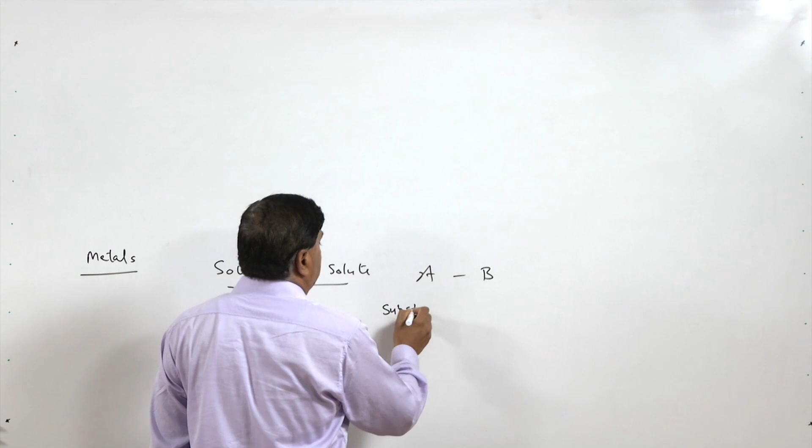We know that different metal systems are strengthened using different mechanisms, including solid solution strengthening, where in metal A, solute B is incorporated so that strength is achieved. Various types of solid solutions, like substitutional and interstitial, are formed. Interstitial solid solution results in much higher strength with the addition of solute as compared to the substitutional solid solution.

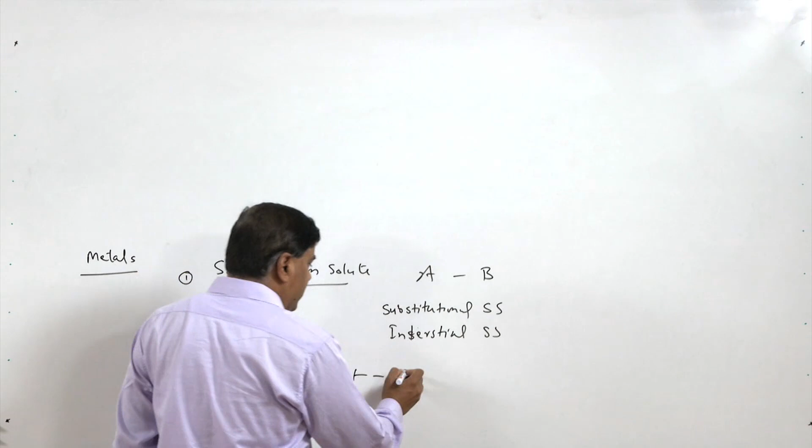Another commonly used mechanism is grain refinement. Metal systems are also strengthened by grain refinement, where strength or hardness is found inversely proportional to the square root of the grain size. Finer the grain, higher is the strength. So whatever factors increase the grain size, either in the weld or in the heat affected zone, they will lower the hardness as well as yield strength.

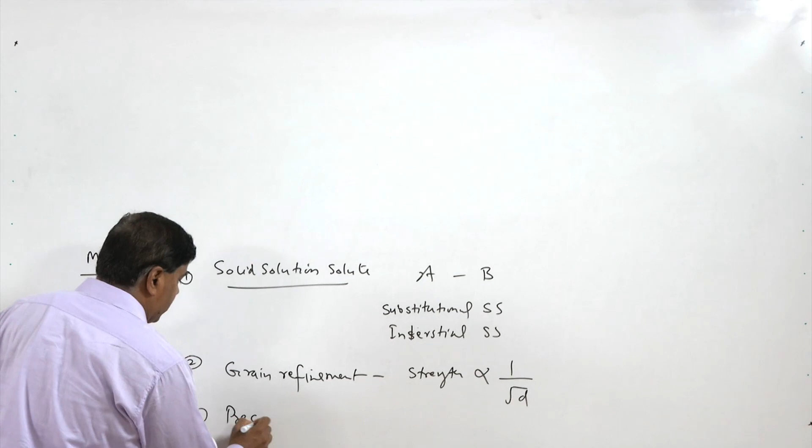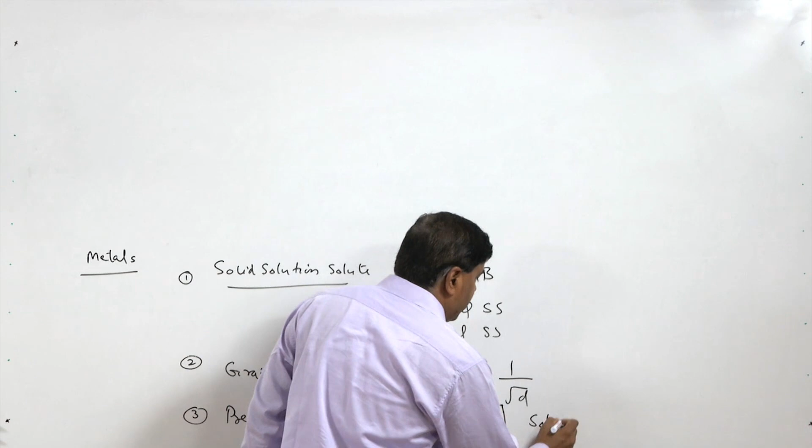Third is precipitation hardening. In this mechanism, whatever alloying elements are there, they are dissolved in the solvent through solution treatment followed by quenching, so that a supersaturated solid solution is formed, and then aging is undertaken. During aging, precipitates are formed here and there, and they impart strength or strengthen the material by forming precipitates in the matrix of the metal.

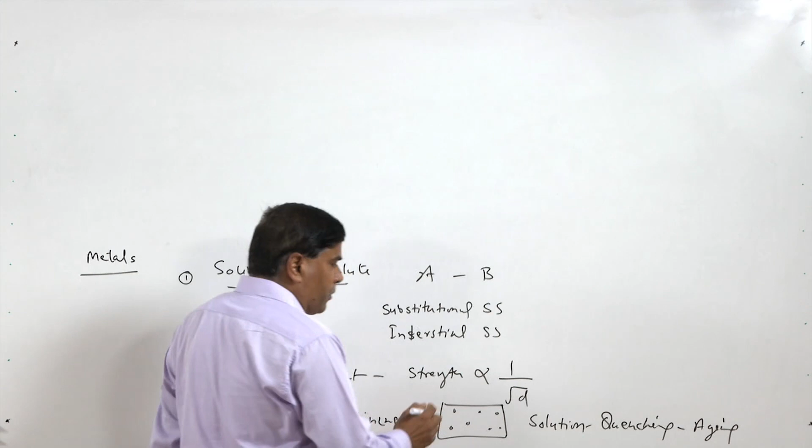So whatever factors lead to the enrichment or increase in number of precipitates will strengthen the material. Otherwise, whatever factors cause the coarsening of the precipitates or their dissolution - either the precipitates get dissolved in the matrix or they get coarsened - both these factors due to application of heat will lower the strength, because these metal systems get their strength from the precipitates, and whenever due to external factors like application of heat the precipitates either get coarsened or dissolved, the metal gets weakened.

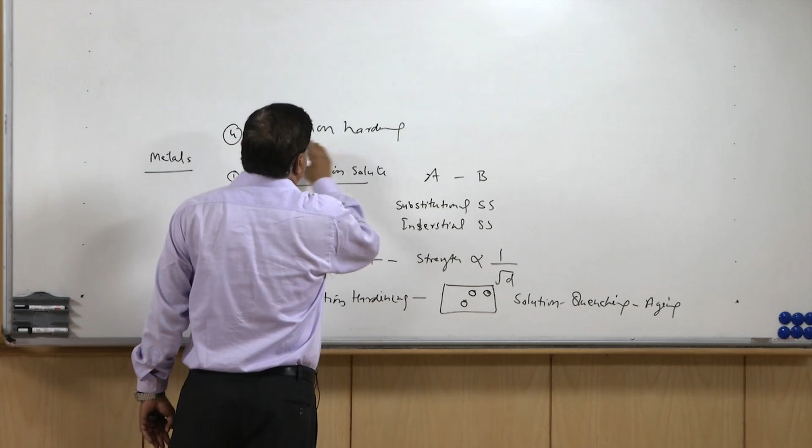Then the fourth mechanism is dispersion hardening. In case of dispersion hardened metals, the matrix is incorporated with certain constituents which do not interact with the matrix itself. These are mostly hard, but can be soft also to impart specific properties, like graphite or lead. Graphite is incorporated for the lubrication effect, and lead is incorporated for free machining, for developing free machining metal systems. But it is common to incorporate hard constituents in the matrix.

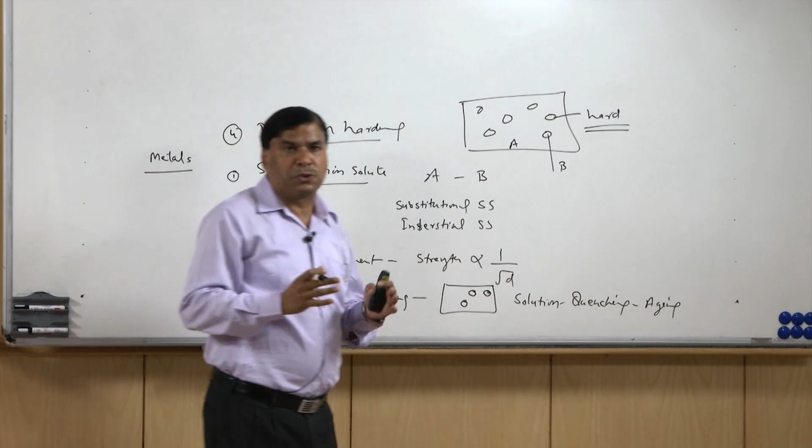So these constituents are not expected to interact - say matrix is A and the constituent being incorporated is B, these are not supposed to interact with each other. Each constituent retains its own identity, thereby imparting increased hardness, strength, improved lubrication or improved wear resistance due to the lubrication effect by solid lubricants like graphite, or improved machinability, etc.

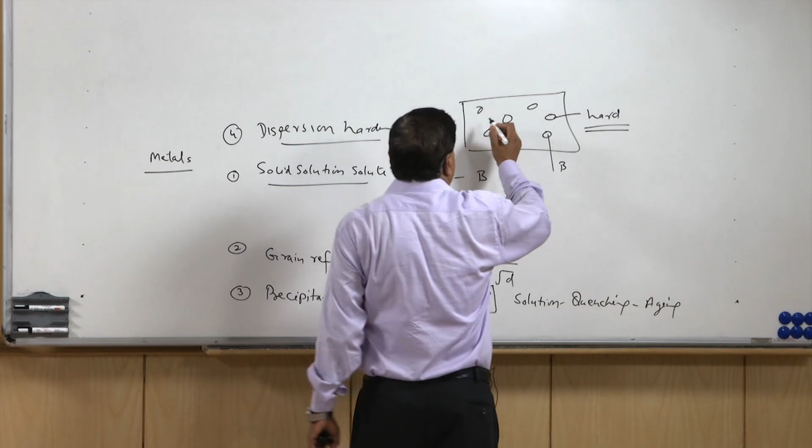So in this case, the application of heat during welding does not actually affect the characteristics appreciably, except whatever change in properties occurs will be due to the change in grain size due to the application of heat. And the fifth one is transformation hardening, transformation hardened metals.

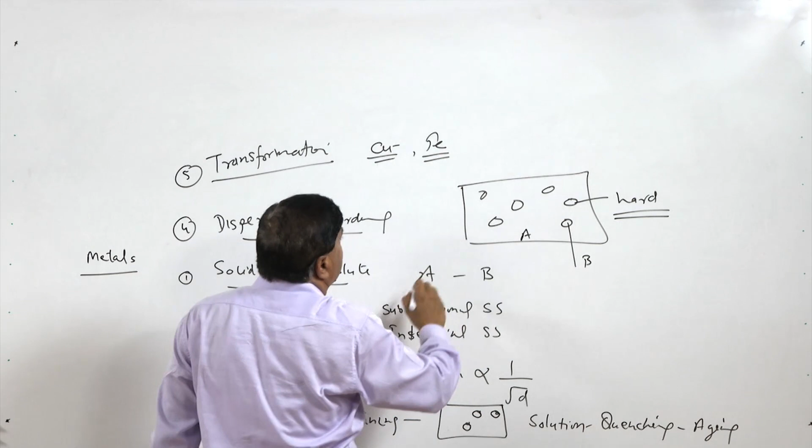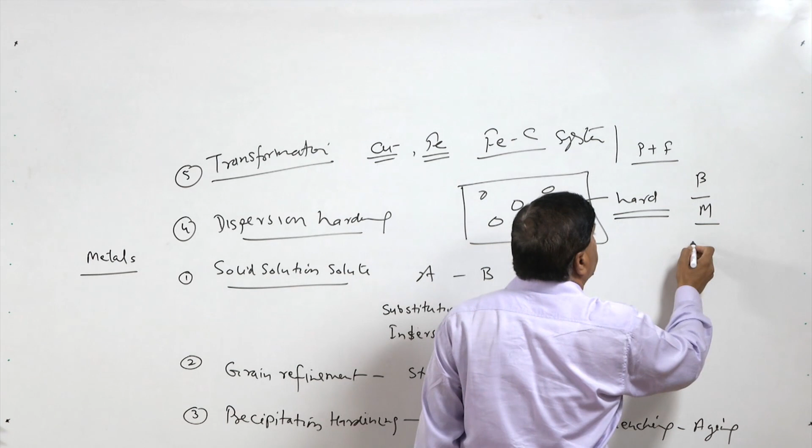Transformation hardened metals are mostly copper based alloys, or mostly iron based alloys. We know that iron-carbon systems form steel or cast irons as per the concentration. These systems result in the formation of different types of phases - in normal carbon steels we find pearlite and ferrite, but when subjected to specific heating and cooling cycles, we may have bainite, martensite, or a very fine mixture of ferrite and bainite, etc. So various phases can be formed, each having their own characteristics, and accordingly the properties will be affected.

In case of welding, the heating and cooling cycles are extremely fast. So the hardenable iron carbon systems result mostly in hardening of the heat affected zone.

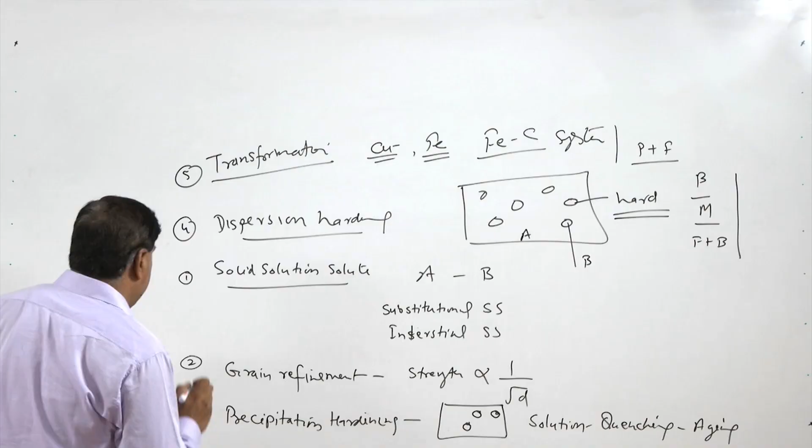So these are the five mechanisms which are there, and their relative effect is what we will be seeing. There is one more, the work hardening mechanism, which is also commonly used for strengthening of the metal.

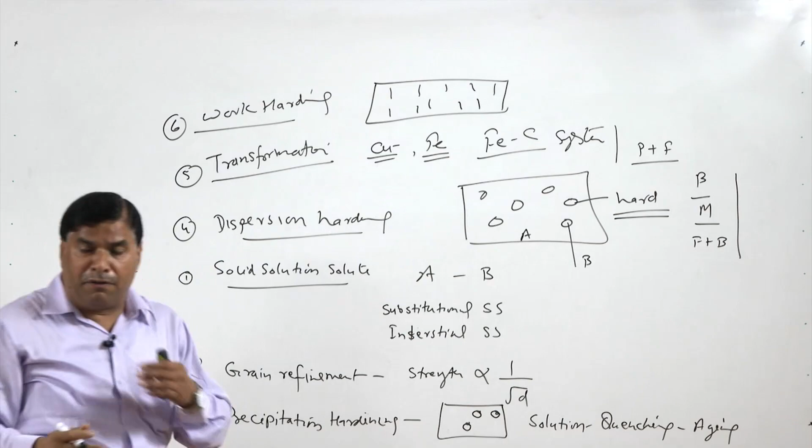In case of work hardening, the metal system is deformed plastically, which produces a large number of dislocations here and there. These dislocations interfere with the movement of other dislocations along the slip planes under external stresses, acting as a barrier for their movement, and thereby increasing the strength and hardness of the metal system.

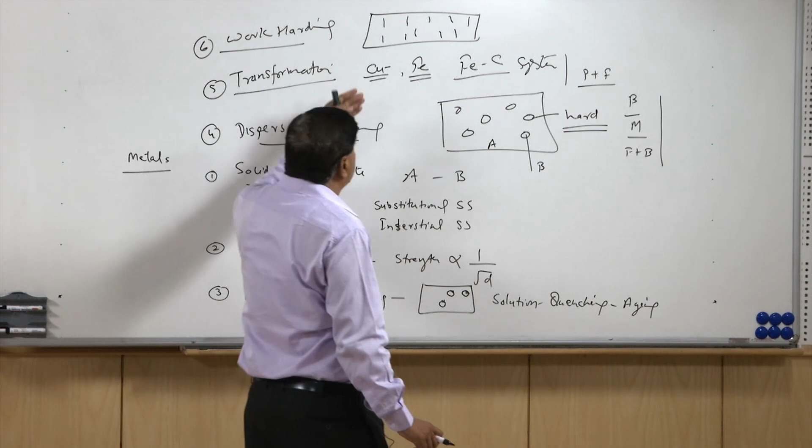As far as welding and the application of heat is concerned, these dislocations actually annihilate, they recover, they are lost due to the application of heat. So work hardened metal systems under the application of heat have the number of these dislocations reduced, which in turn softens the metal system.

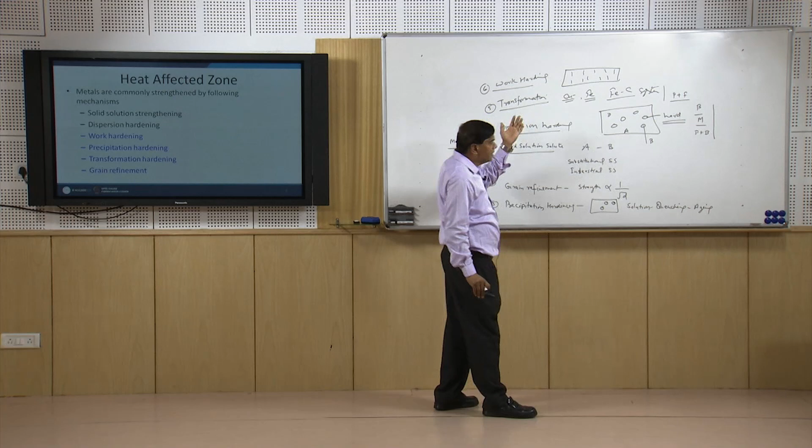As far as the heat affected zone is concerned, different metal systems strengthened by different approaches respond to the heat in different ways. So what is that effect? That is what we will be seeing.

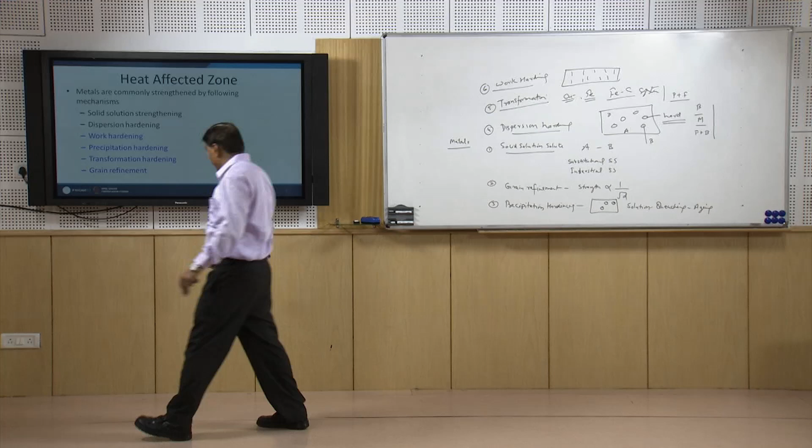The solid solution strengthened and dispersion strengthened or hardened materials are somewhat less affected by the heat applied during welding, while in case of the work hardening system, the effect of work hardening is lost due to annihilation or recovery of the dislocations, and the precipitation hardening is affected due to the application of heat

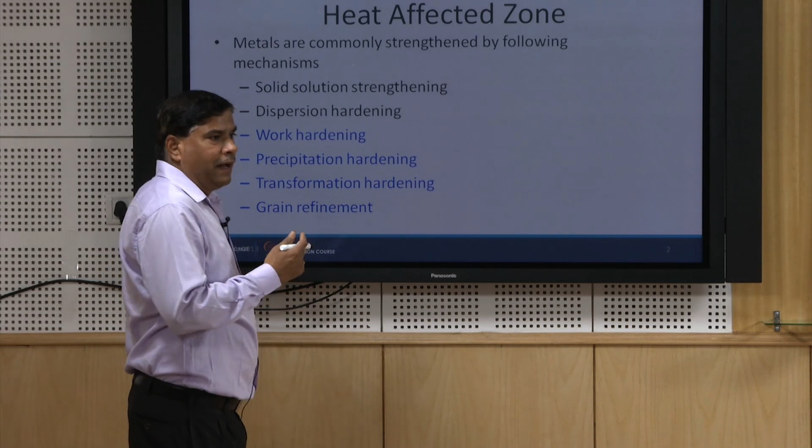during the welding heat affected zone near the fusion boundary. These precipitates either get coarsened, or they get lost or dissolved due to the application of heat. So the metal gets softened.

In transformation hardening, mostly high rate of heating and cooling, in case of ferrous metal systems, mostly causes hardening despite grain coarsening. And for grain refinement, the metal systems which are only strengthened by grain refinement, the coarsening in the heat affected zone will lower the hardness and strength of the metal system.

So this is a very generic kind of description of the different metal systems and the way by which things will be affected with respect to the heat affected zone. Now I will be elaborating what the heat affected zone is first, and then the way by which a specific kind of metal system is affected with the application of heat, or due to the weld thermal cycle.

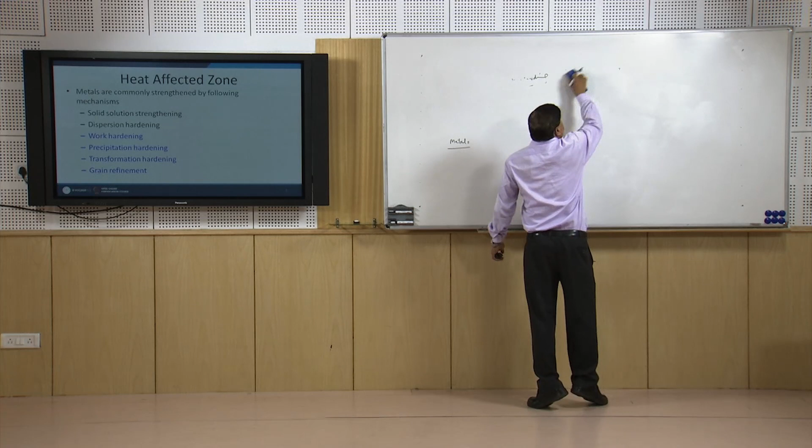So the heat affected zone, as it reflects from its name or term, is the zone or region of the base metal which is affected by the heat applied during the welding of a given metal system. Every region which is affected by the heat, in terms of structure or mechanical properties, will be falling under the category of the heat affected zone.

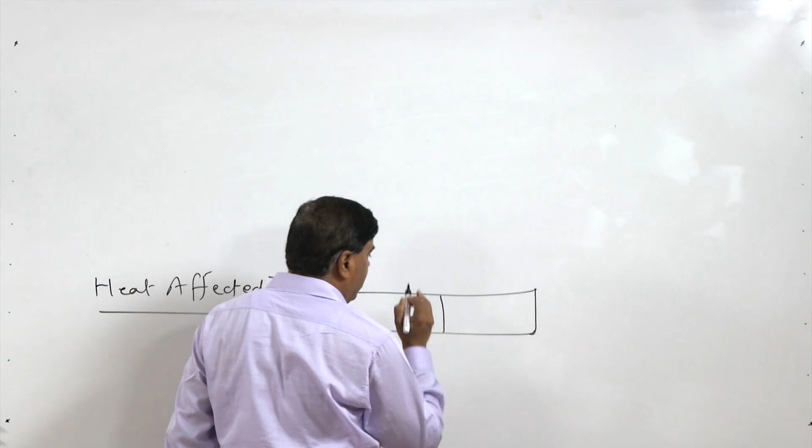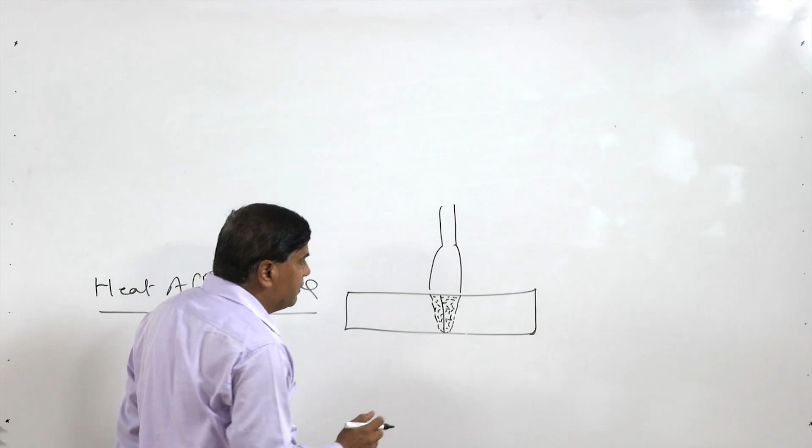During welding, the plates are joined with the application of a heat source. Say a suitable arc is used for melting the edges of the plates to be welded. This melting results in the weld metal, and some of the heat applied for melting the edges of the plates is transferred to the underlying base metal. This heat which is transferred back to the base metal, away from the weld metal zone, is termed as the heat affected zone.

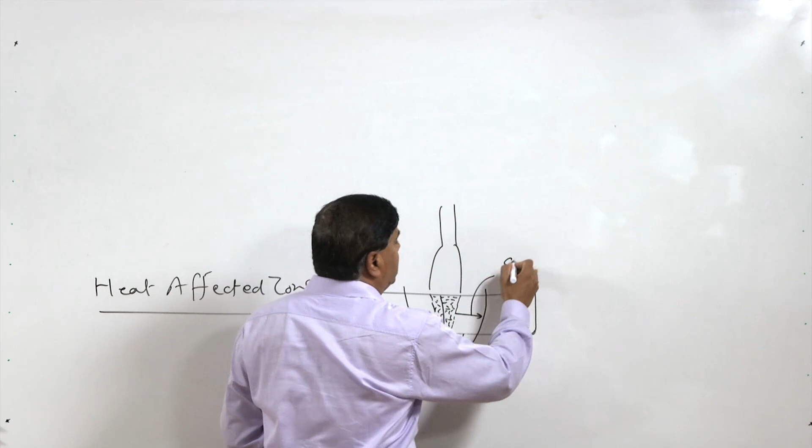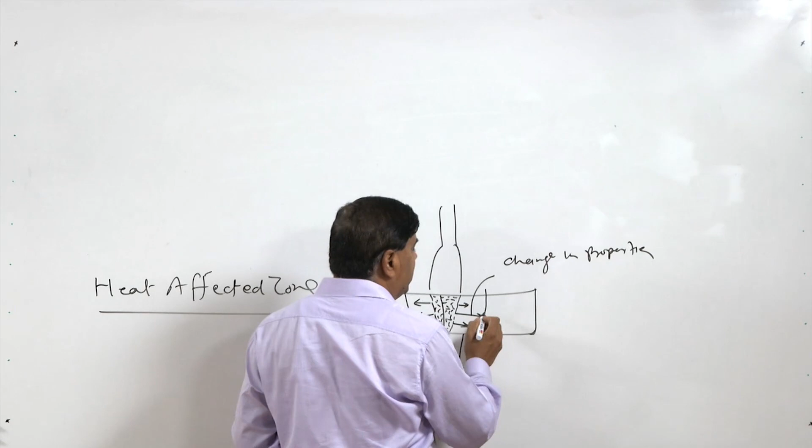But up to what extent the heat affected zone will be formed depends on the distance up to which the change in properties is observed. So heat will obviously be transferred from the fusion zone to the base metal side, in both directions, and due to this heat there will be a rise in temperature. The rise in temperature up to a particular limit for a given metal will cause the change in properties of the base metal.

This change in properties may be in respect of microstructural variation in terms of mechanical properties, wherein either hardening or softening of the metal in the heat affected zone can take place, or there can be loss of corrosion resistance.

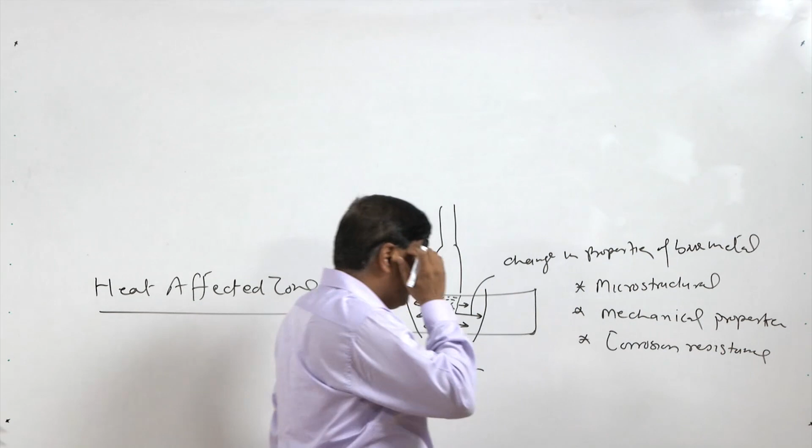Corrosion properties can also be affected. Whenever heat is applied to the plates for fusion, some of the heat is transferred to the base metal, and this changes the underlying base metal properties in respect of structure, mechanical properties, and corrosion properties, either singly or in combination.

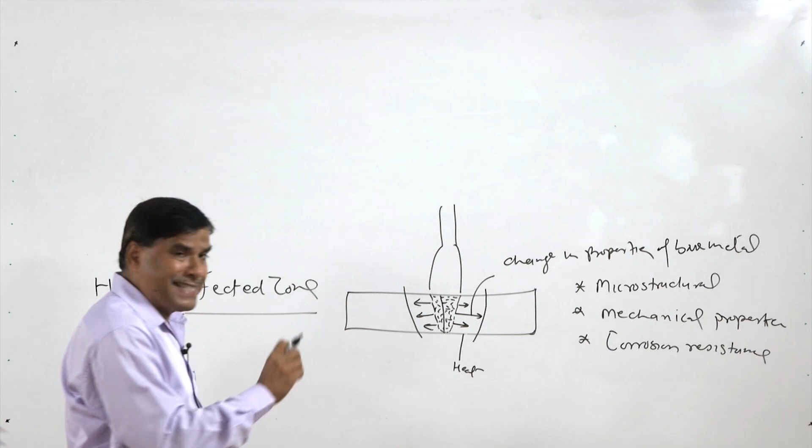The distance up to which these properties are affected is material specific. This change may occur up to the region heated above 200 degree centigrade, or above 500 degree centigrade, depending upon the metal system. For example, when aluminum systems are welded, the regions heated above 150 degree centigrade will fall in the heat affected zone.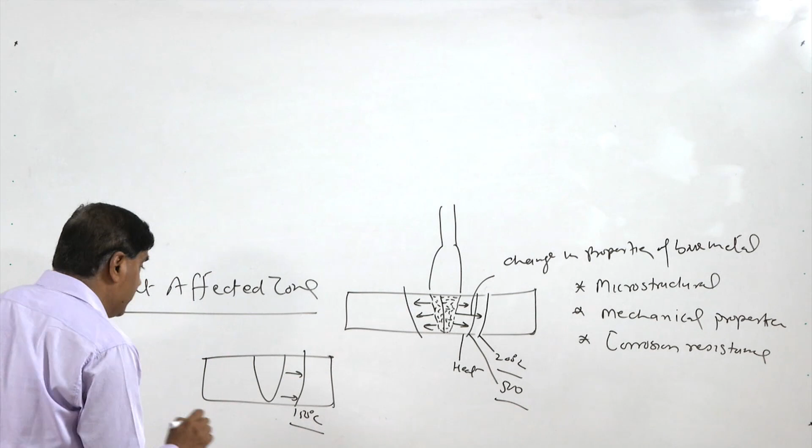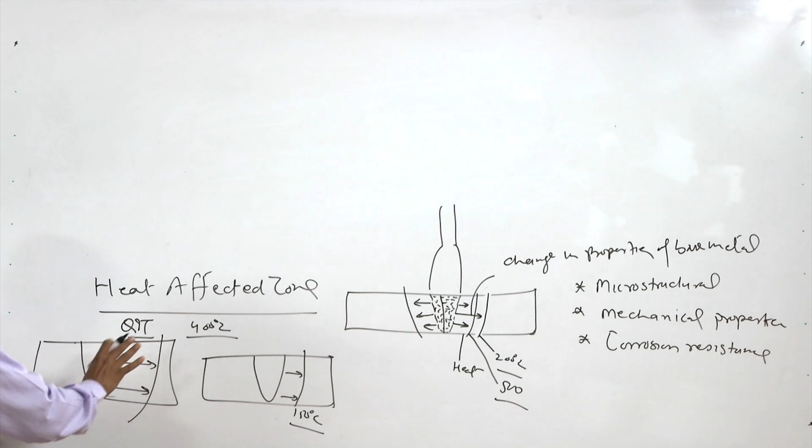In case of steel, say carbon steels in normal annealed condition, the regions heated above 730 degree centigrade form the heat affected zone. If it is in quenched and tempered condition, say Q&T steel tempered at 400 degree centigrade, all regions heated above 400 degree centigrade will be over tempered. So all regions away from the fusion boundary heated above 400 degree centigrade will fall under the heat affected zone.

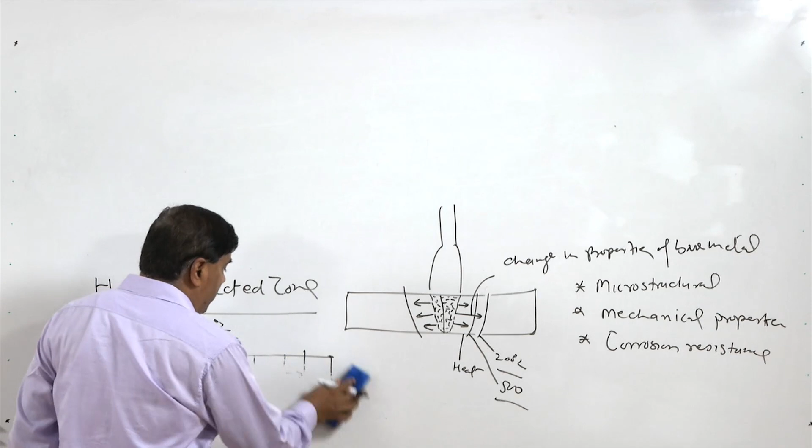So the temperature above which the heat affected zone is formed is material specific, and even for a given metal system, its condition also affects that particular temperature. This temperature may be 150, 200, 400, 800, anything, depending upon the kind of metal system. This is how the heat affected zone is defined, and it experiences change in properties due to the heat applied during welding.

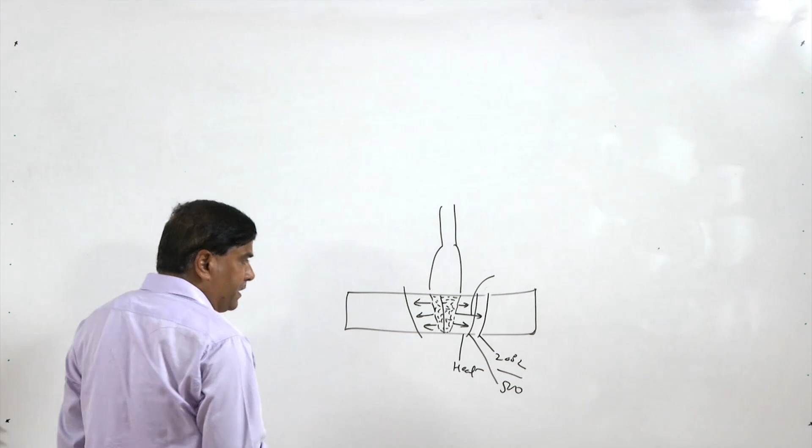Whenever heat is applied, fusion occurs at the faying surfaces. If we take 3 points away from the fusion boundary - point 1, point 2, and point 3 - each point experiences a different weld thermal cycle. Point 1 experiences higher peak temperature and higher cooling rates.

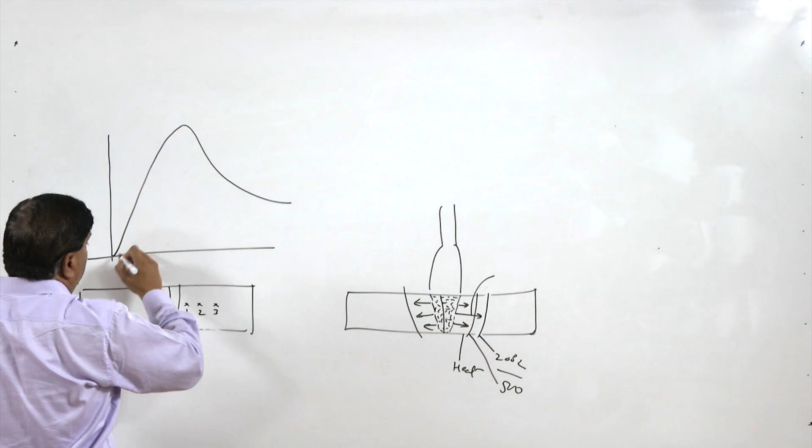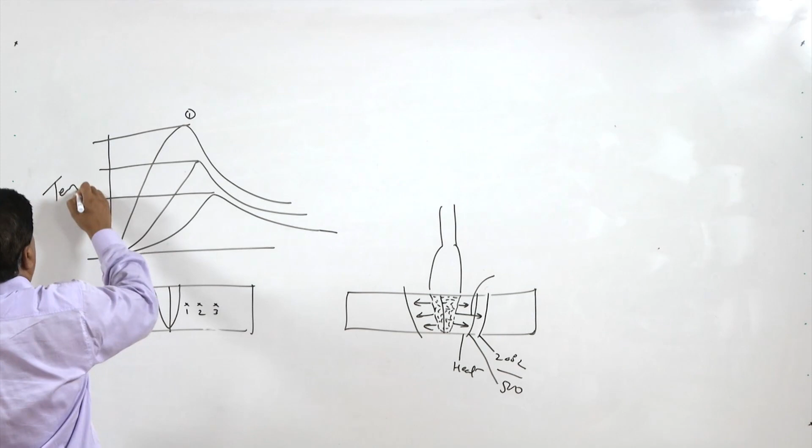Similarly, point 2 experiences somewhat lower peak temperature and lower cooling rates, and point 3 has even lower peak temperatures and lower cooling rates. So for point 1 this is the peak temperature, for point 2 this is the peak temperature, and for point 3 this is the peak temperature. On the y-axis we have temperature, on the x-axis we have time.

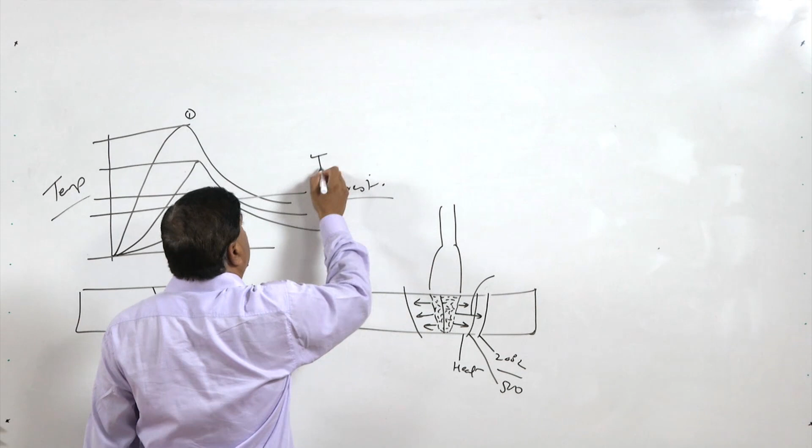This reflects that if we take any particular temperature, the 3 points will be exposed above it for a particular duration. If this is the temperature of interest, above which properties will be affected, we can find the duration for which point 3 is exposed.

The duration for which point 3 is exposed above the temperature of interest is just this much, while the duration for point 2 is this much, and similarly for point 1 and point 2 marked here.

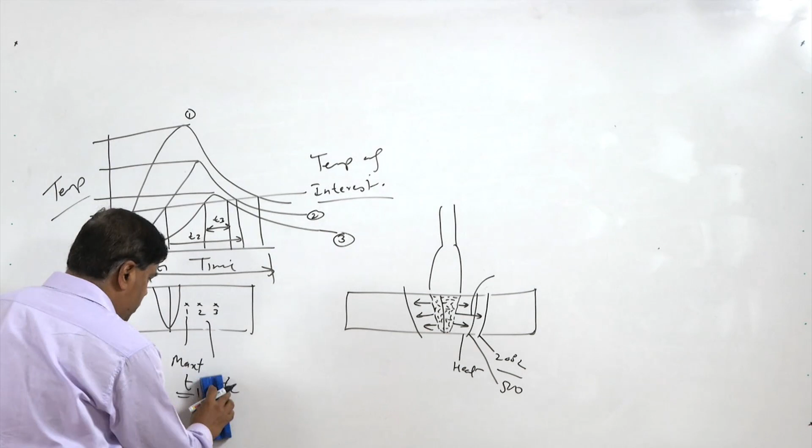So t1 is for point 1, t2 for point 2, t3 for point 3, and we see that t1 is really very long. If the temperature of interest is known, T1 will be exposed for the maximum time, then T2, then T3. So T1 is maximum, T2 is lesser than T1, and T3 is minimum.

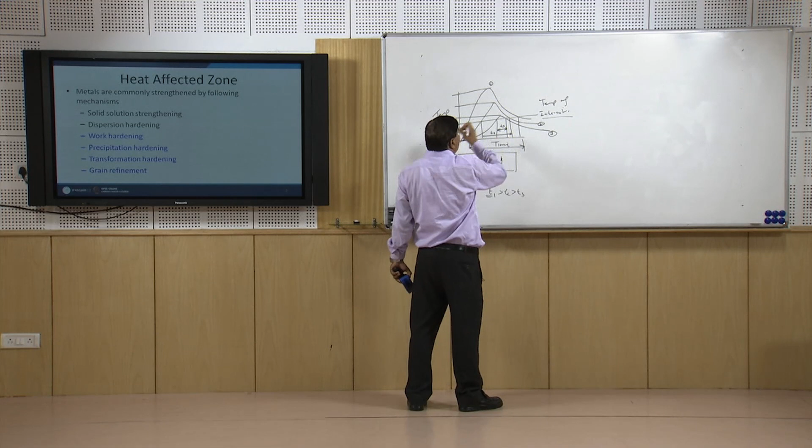The temperature and the time for which a particular point is exposed governs things appreciably. Different zones experience different peak temperatures and durations. Point 3 experiences a very low peak temperature for a very short duration, while the peak temperature for point 2 is higher, and for point 1 is higher still. So the temperature to which a point is exposed and the duration above that temperature are two factors that play a big role in determining the characteristics of the heat affected zone.

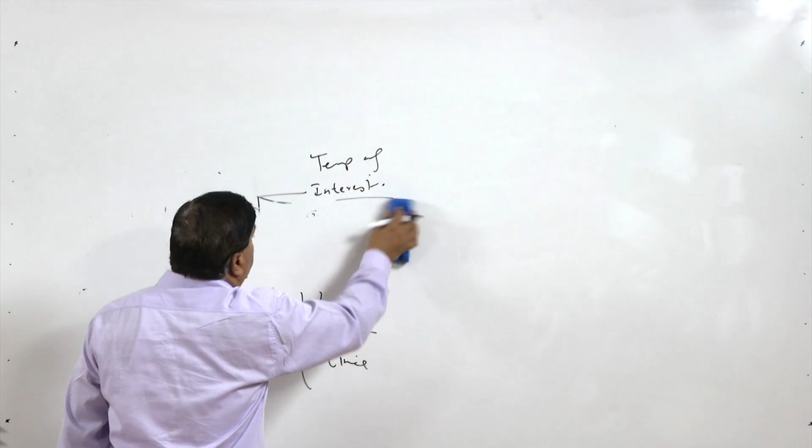Considering this background, we will now see how different metal systems respond. Here I will first talk about the work hardened metal system.

Work hardened metal systems, work hardening metal systems.

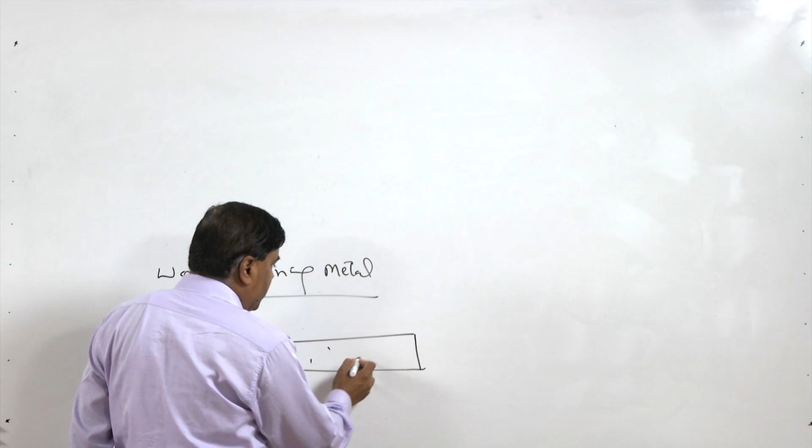We know that most metal systems during manufacturing are deformed plastically, and they get strength from that, like rolling or forging, especially done under low temperature conditions. Under those conditions, plastic deformation develops a lot of dislocations, which in turn increases the strength and hardness of the metal system. Work hardening metal systems are designed to be deformed for fabrication purposes, so that during manufacturing itself sufficient dislocations are generated, and these dislocations impart strength and hardness to the metal system. But when these metal systems are subjected to welding, in which way do they respond? That is what we will see.

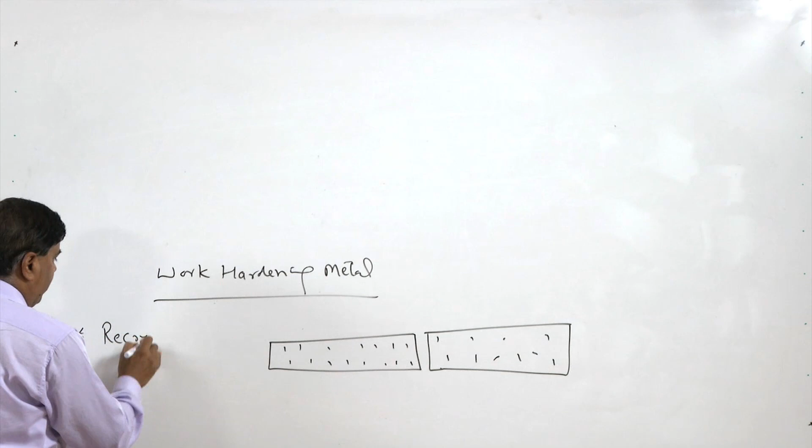There are basically two ways by which work hardened metal systems are affected by the application of heat during welding: recrystallization is one, and grain growth is another. Both these factors are influenced by the heat applied and the time for which the high temperature is maintained.

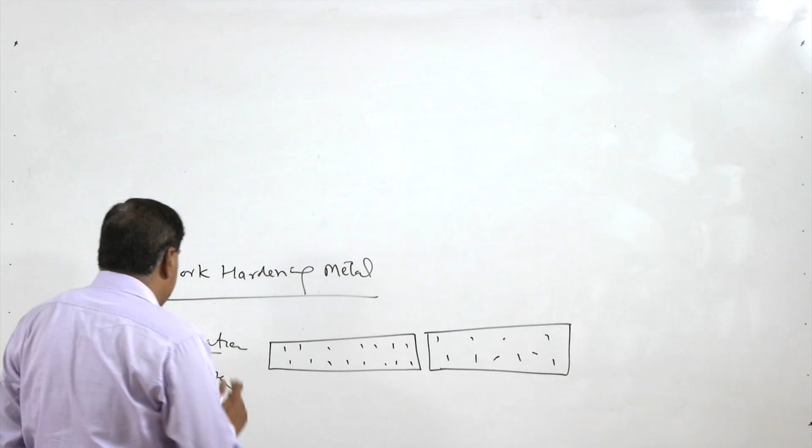So we will take up the first one, recrystallization. The driving force for recrystallization is the strain energy stored - greater the deformation, greater will be the strain energy stored, so easier will be the recrystallization. Recrystallization occurs at a particular temperature.

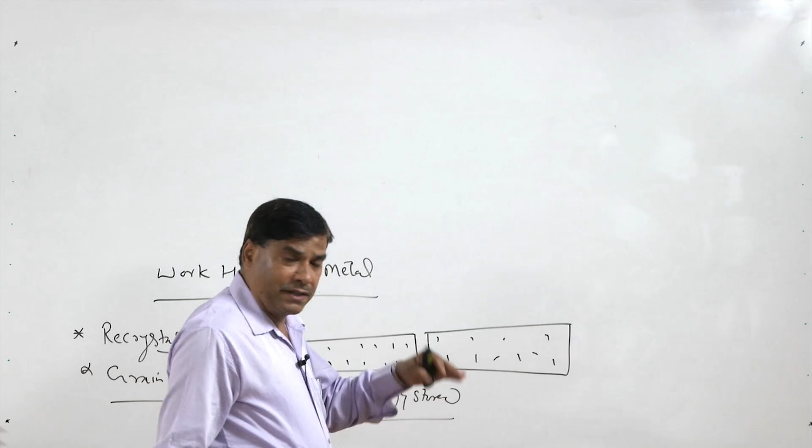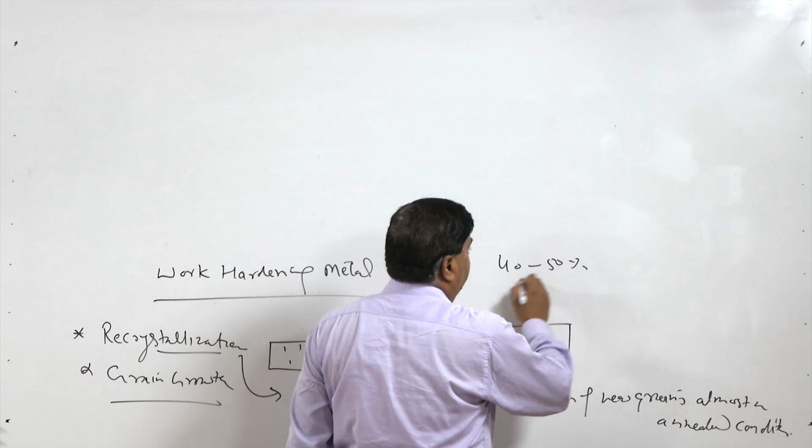So what is recrystallization? It is about the formation of new grains, almost in annealed condition, meaning all the work hardening effect is lost and whatever new grains are formed are in annealed condition. This formation of new grains happens at a particular temperature, like say 40 to 50% of the melting point temperature in Kelvin of the given metal, and this temperature sometimes decreases with an increase in the strain energy stored, due to the kind of deformation the material has been subjected to. So what we will see here is that the strain energy stored affects the temperature at which recrystallization occurs.

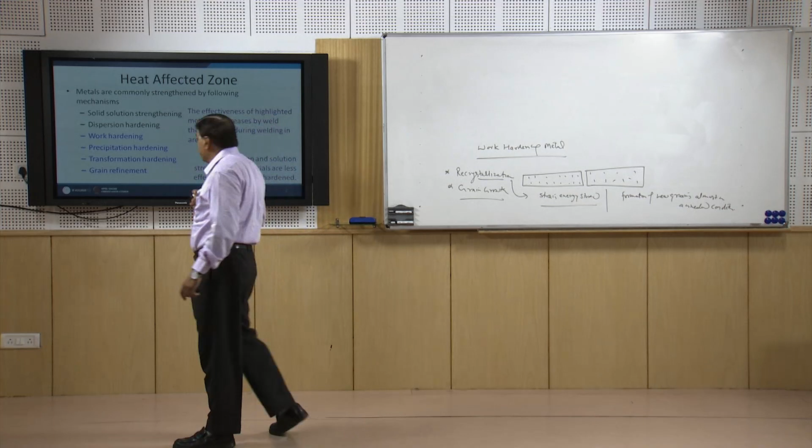As we increase the deformation, increase in elongation takes place, say increase in strain is taking place. So the stored energy increases continuously, and the fraction of energy stored out of the energy supplied keeps on decreasing. So strain energy stored increases with the strain or deformation being applied.

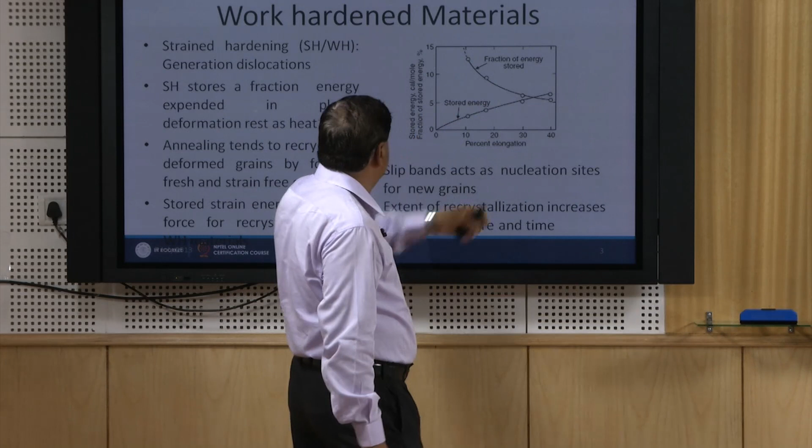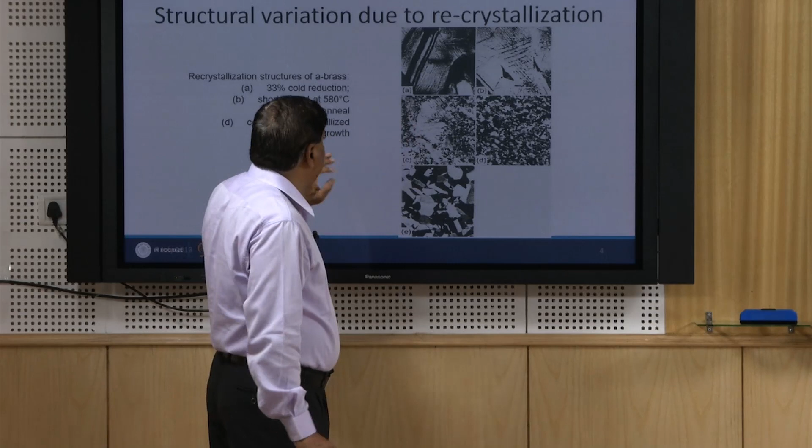Whenever heat is applied, the material in a very strained condition offers a large number of dislocations. When the material is annealed for a short period, some of these dislocations are lost or annihilate, and further longer annealing results in complete loss of these dislocations, and then complete recrystallization and formation of new grains take place with continuous exposure at high temperature - that is called annealing. And after complete recrystallization, if further exposure at high temperature during welding continues, it results in coarsening of the grains.

So material, right from its original deformed state showing a large number of dislocations, will have these dislocations keep decreasing with increase in time at a particular temperature during annealing, and overexposure causes grain growth - this is the third or last stage. So first recrystallization, and thereafter grain growth takes place.

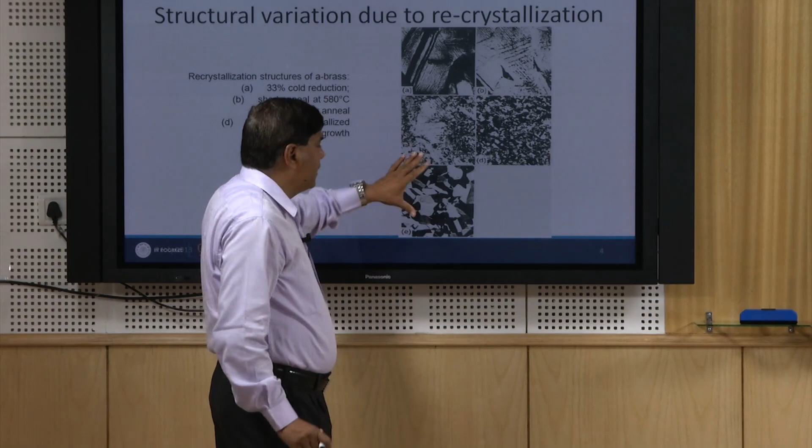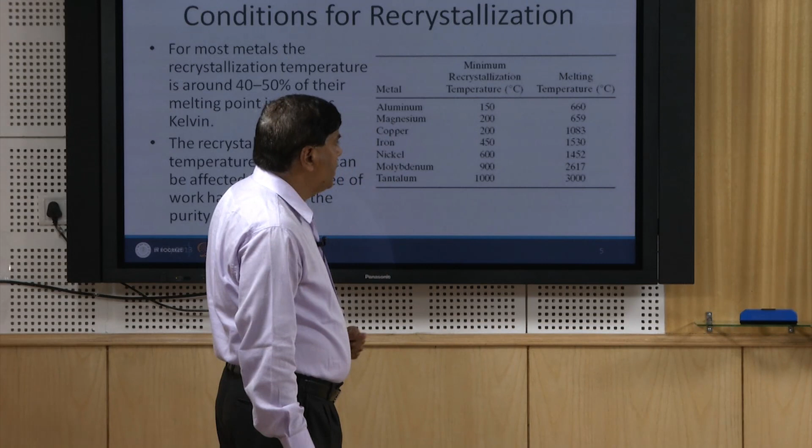Different metal systems show recrystallization tendency at different temperatures. With respect to metal systems, aluminum recrystallizes above 150 degree centigrade while its melting point is 660 degree centigrade. Similarly, magnesium recrystallizes above 200 degree centigrade while its melting point is 659. Similarly, iron recrystallizes above 450 degree centigrade while its melting point is 1530 degree centigrade. So likewise, each metal recrystallizes as soon as exposure above a particular temperature is given, and this is found to be significantly lower than its melting point.

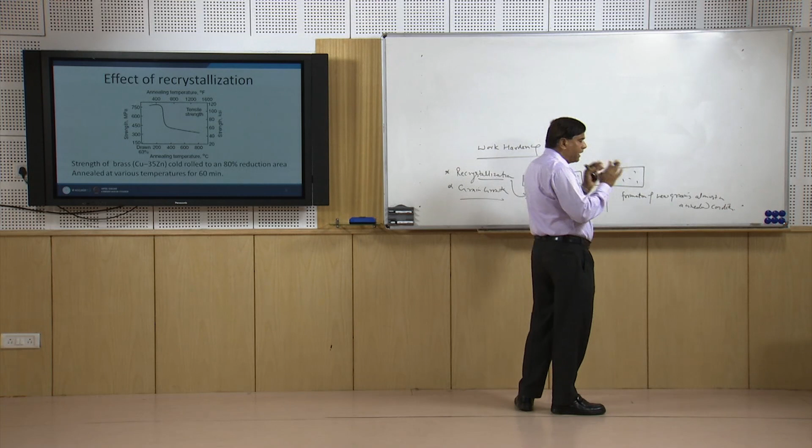So we know that metals get strength from dislocations, and in the course of exposure these dislocations are lost, which in turn lowers down the strength of the metal system.

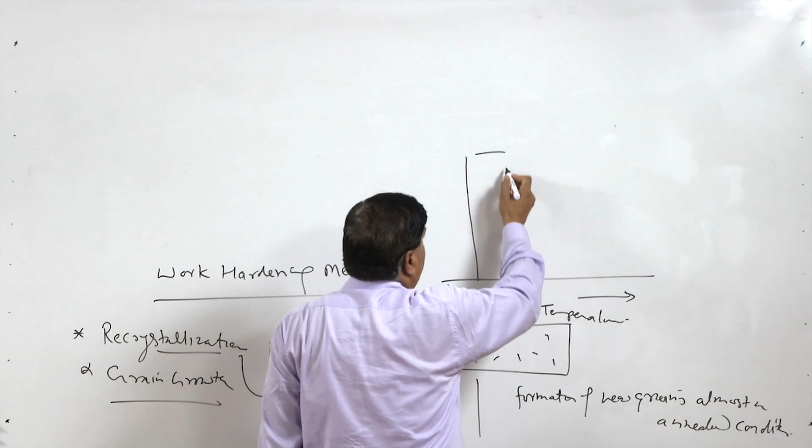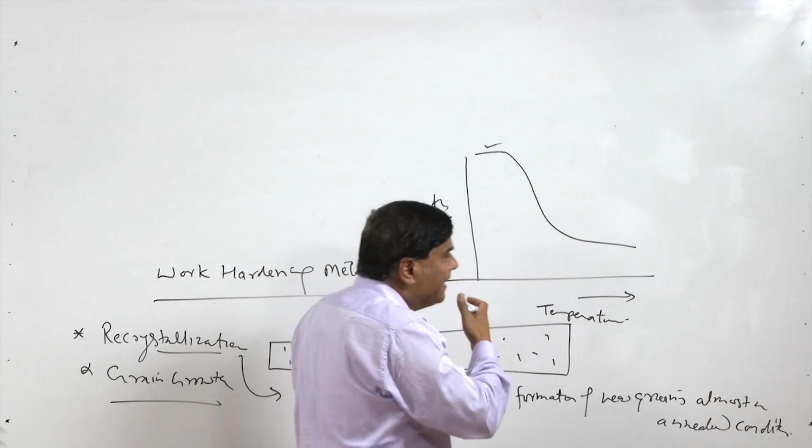As the temperature of exposure increases, the metal which is in work hardened condition will be offering higher strength initially, but as the temperature of exposure is increased further, we see a significant reduction in strength. Cold worked metal offers very high strength, but as it is exposed to increasing temperature or increasing annealing temperature, the extent of recrystallization increases and it lowers down the strength of the metal system.

For example, the material cold drawn up to 63%, when given exposure to a higher temperature say 200 degree centigrade, shows no major drop in hardness. But as the exposure temperature is increased to 400, 600, 800 degree centigrade, there is a sudden drop in the strength of the brass which has been cold drawn.

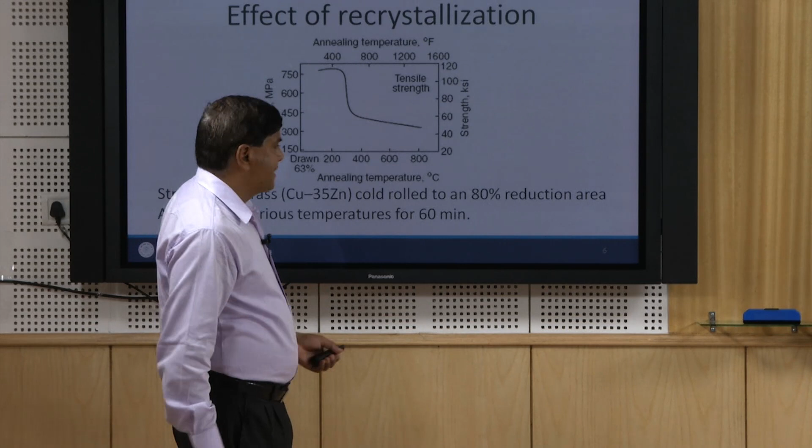This reduction in strength takes place, and this sharp reduction is attributed to the complete recrystallization occurring for the brass, since the recrystallization temperature for brass, as seen in the previous slide, is around 200 degrees centigrade. So as soon as it is exposed, very quick and rapid recrystallization takes place, resulting in a significant drop in the strength of the brass at high temperature exposure.

This is what we can see: whenever the work hardened metal system is exposed to external heat, the metal near the heat affected zone recrystallizes, and the formation of new annealed grains lowers down the strength of the metal as compared to the work hardened condition.

So basically, the effect of work hardening is lost due to recrystallization, and if the application of heat and high temperature exposure is continued further, it will cause growth of the grains. Growth of the grains again will cause reduction in strength and hardness because of grain coarsening.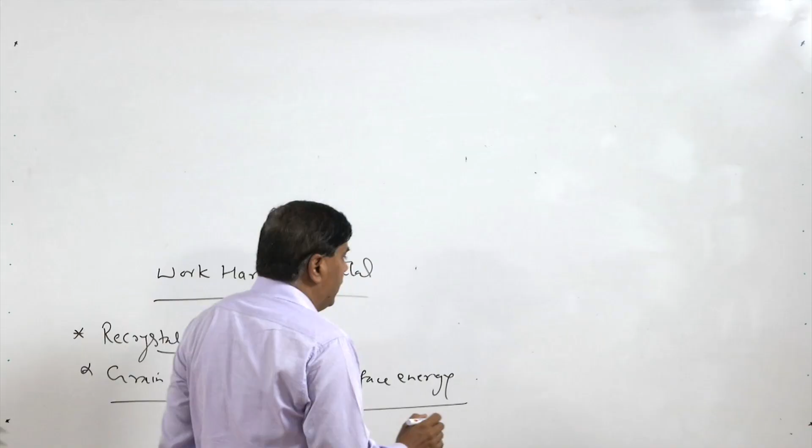The driving force for grain coarsening is different from the driving force for recrystallization. So we will now look at the factors governing grain growth. The driving force for grain growth is surface energy, not strain energy like in recrystallization. Most metal systems are made of a large number of grains; the more the number of grains, the larger the grain boundary area, the greater the strain, and the greater the surface energy associated with that.

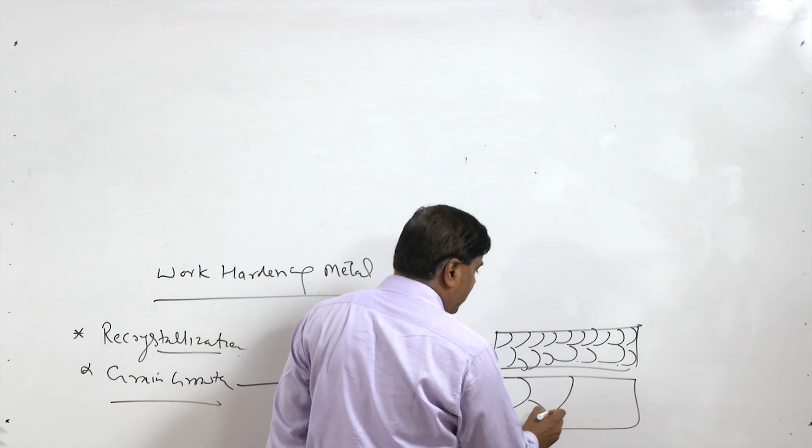All metal systems try to attain minimum energy for maximum stability, and therefore, under favorable conditions, metal systems tend to attain larger grain size, so that fewer grain boundary area can help reduce the surface energy associated with them.

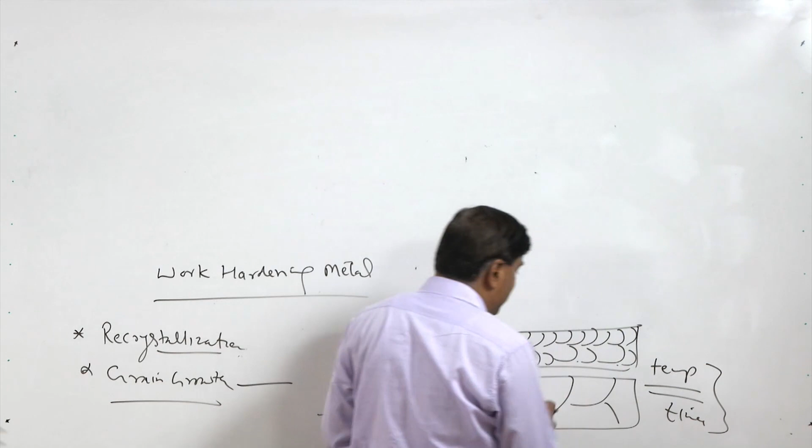So for this purpose what is needed? High temperature, since this process is governed by diffusion, or is diffusion dependent. It needs enough temperature and time, so that diffusion can facilitate the coarsening, facilitating this change in grain size for maximum stability of the system.

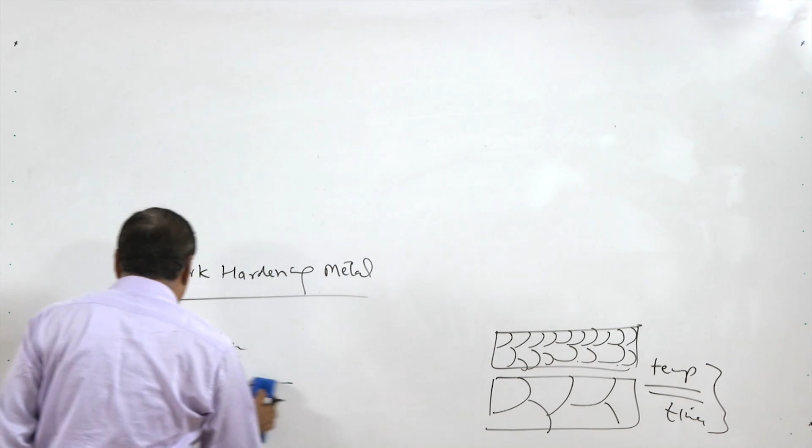Systems tend to reduce their surface energies, and because strain energy does not play any role in grain growth, it is surface energy that governs the grain growth aspect. Therefore, the grain growth phenomena is not limited to work hardening materials only, but applies to all kinds of systems.

Most metal systems are polycrystalline in structure, and they tend to attain minimum surface energy through grain coarsening. So whenever favorable conditions for diffusion exist, high temperature or sufficient time present, it will cause grain growth.

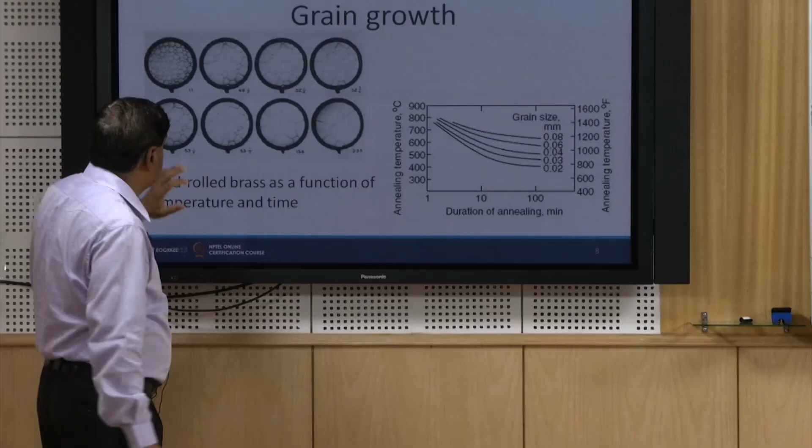So now we will see the way grain growth is affected. The driving force for grain growth is surface energy, not strain energy, so grain growth is not limited to work hardened metal systems but applies in all cases. For a cold rolled metal system, we see how grain size is affected as a function of time and temperature. Work hardened metal systems have very fine grains, and as exposure keeps increasing in terms of time, there is a continuous increase in the grain size.

This diagram shows the same thing - annealing temperature versus annealing time. So temperature versus time, as we can see here: in the x-axis we have time, and in the y-axis we have temperature.

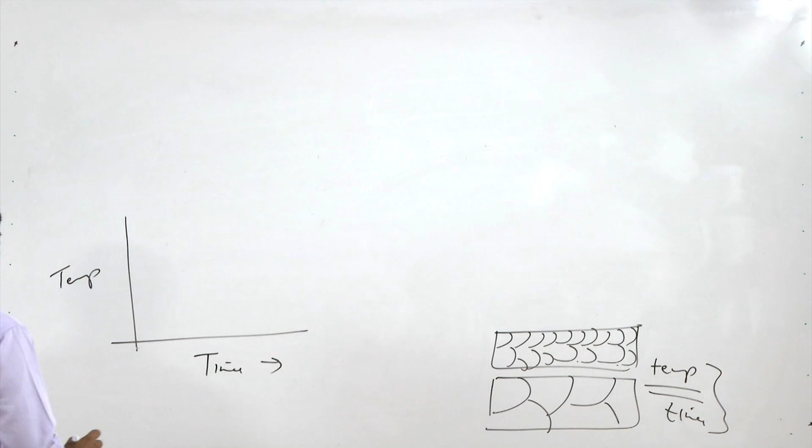So how the grain size changes - let's consider 3 grain sizes, say 0.02, 0.04, and 0.08 inches, or we could also include 0.06 inches. This is the grain size in inches, and typically the temperature values are 300, 400, 500 and so on, with time in log scale: 1, 10, 100, 1000 hours.

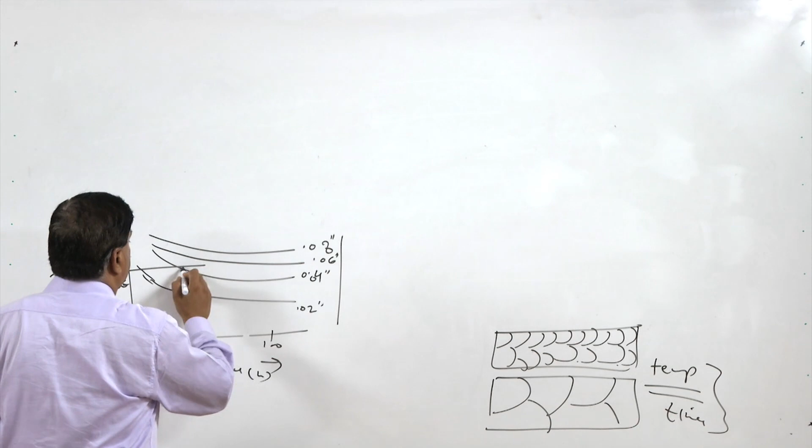For a given grain size, let's say 0.04 inch, we can see how the grain size changes as a function of time. If the exposure is given at 600 degrees centigrade, the grain size will be, say, 0.02 after 1 hour, then 0.04 after about 8-10 hours, then 0.06.

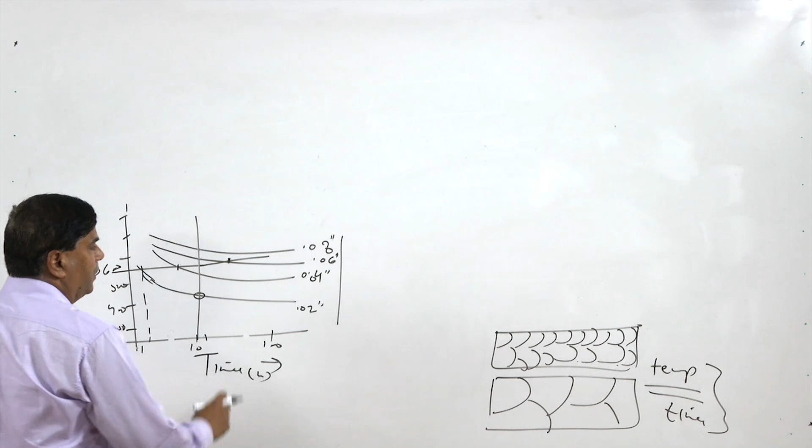So as a function of time, increase in time coarsens the grain, and similarly for a given time, increase in temperature also increases grain size - for example, 10-hour exposure at 450 degrees centigrade leads to 0.02 inch grain size, and the grain size keeps increasing with temperature for a given period. So basically, for a given temperature, increase in time increases grain size, and for a given time, increase in temperature increases grain size.

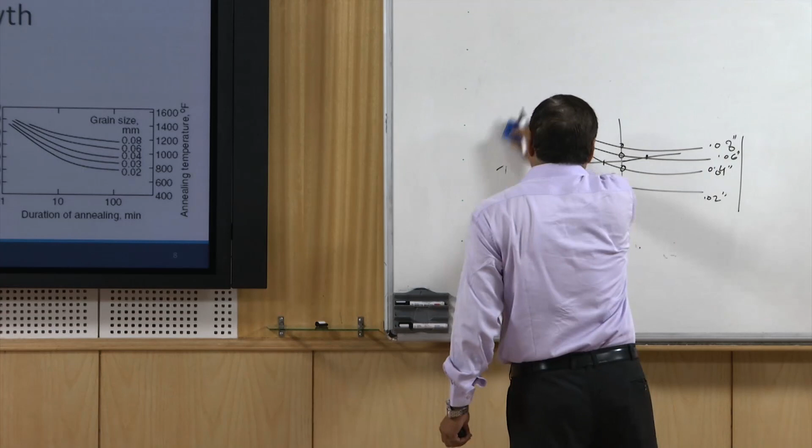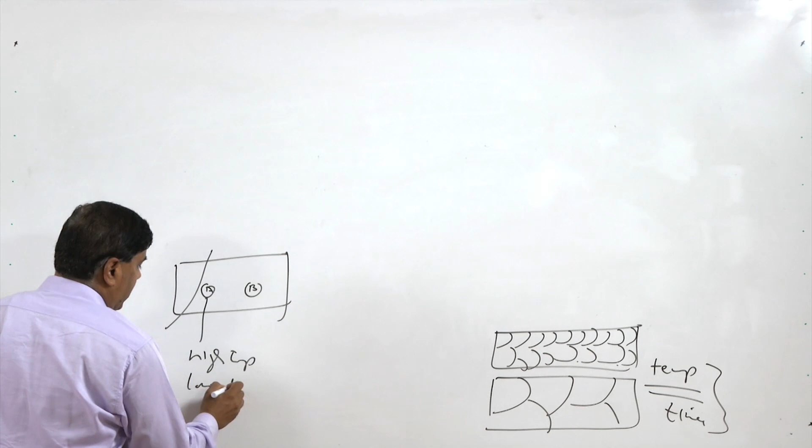Now we have to relate this to weld joints. We know that points closer to the fusion boundary will have higher temperature - like points A and B. Point A will have high temperature and long duration at high temperature, as we've seen from the weld thermal cycle, while point B will have low temperature and short high-temperature exposure - just the opposite.

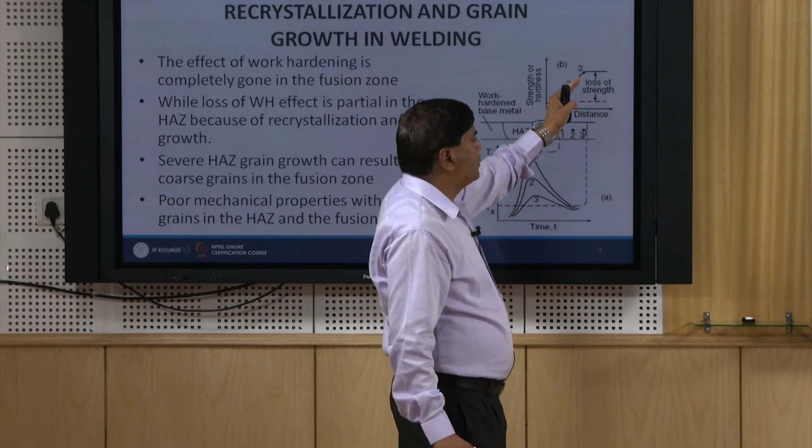This is the effect of the weld thermal cycle. When the point is very close to the fusion boundary, the peak temperature is high, and the duration of high temperature exposure is also long compared to points 2 and 3. Accordingly, the loss of strength due to recrystallization and grain growth is maximum at point 1, and this loss of strength and hardness decreases as the distance from the fusion boundary increases.

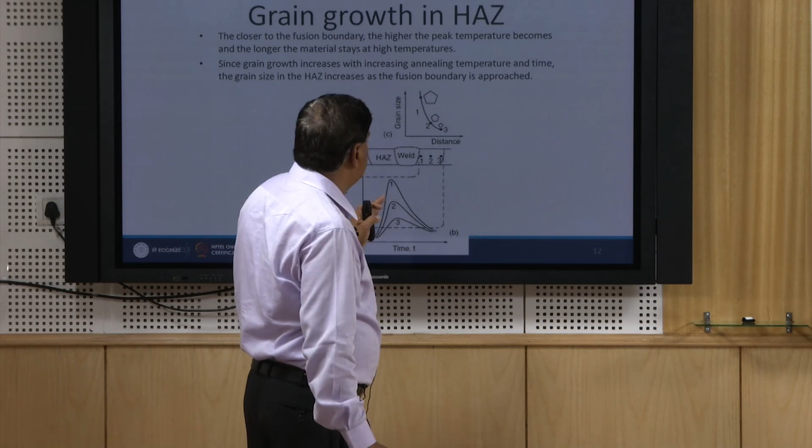This is what we can see here - points very close to the fusion boundary will have coarser grains, and as we move away from the fusion boundary, the coarsening decreases. The same thing can be seen here: point 1, very close to the fusion boundary, compared to 2 and 3, will experience more grain growth.

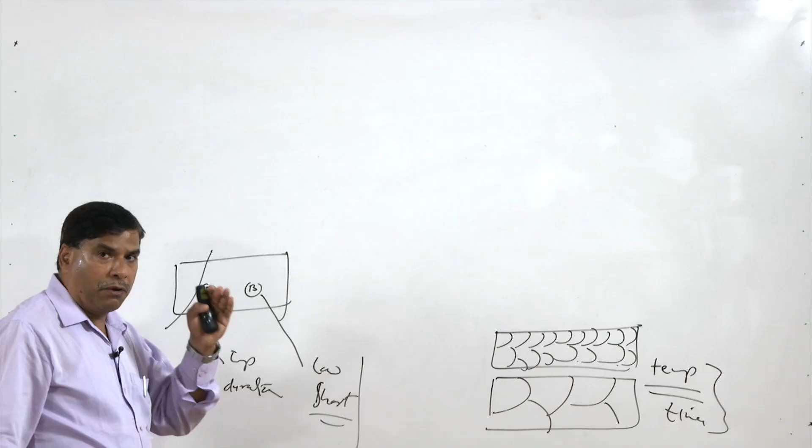Point 3 will have minimum grain coarsening compared to 2 and 1. The main reason for this is the difference in peak temperature and the duration of high temperature exposure - both the temperature and the duration will be higher for point A compared to point B. That's why maximum coarsening takes place near the fusion boundary compared to regions away from it.

Now I will summarize this presentation. We have seen the different mechanisms used for strengthening metal systems, and how the heat of welding can affect the properties of metal systems strengthened by different approaches. Especially, I discussed in detail how the weld thermal cycle affects heat affected zone characteristics, and accordingly its effect on grain size and properties of the heat affected zone, especially of the work hardened metal system. Thank you for your attention.